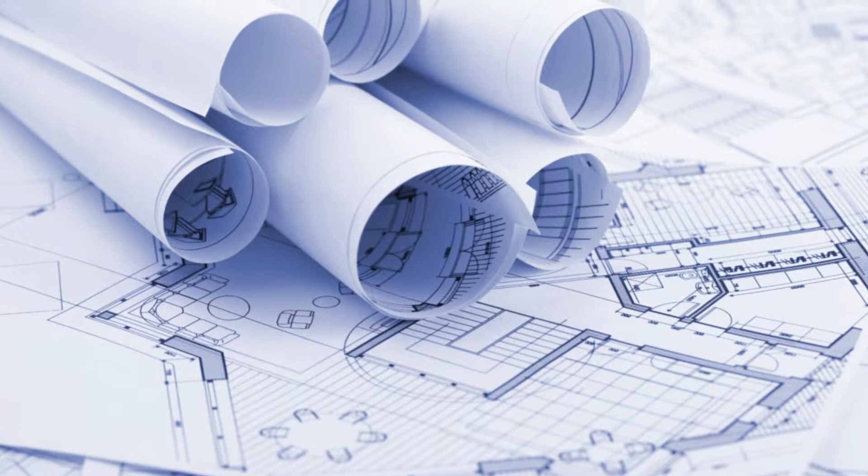How to get rid of the old stuff and what are the plans. Because without that, we've got no direction. If we've got the wrong plans, it's like having a compass that's not actually pointing north when we think it is. So what makes up the plans is basically the quote, the plans, meeting notes, and site sketches. Let's run through them now.

Alright guys, let's get into it. When we go into a job, let's pick this current job that I'm on. We've got 3 folders. For you guys, the foreman, you see site documents, you don't need to worry about these two. So what we're talking about is navigating through the job, having the right scope, having the right plans.

Let's jump into plans, which is where the main stuff is. For this job here, it's pretty early on, nothing's been updated. So what you've got in here, old plans, there's nothing in there. But at some point, as a new architectural drawing comes through, you'd drag this plan up into there and see you later, just dump it in.

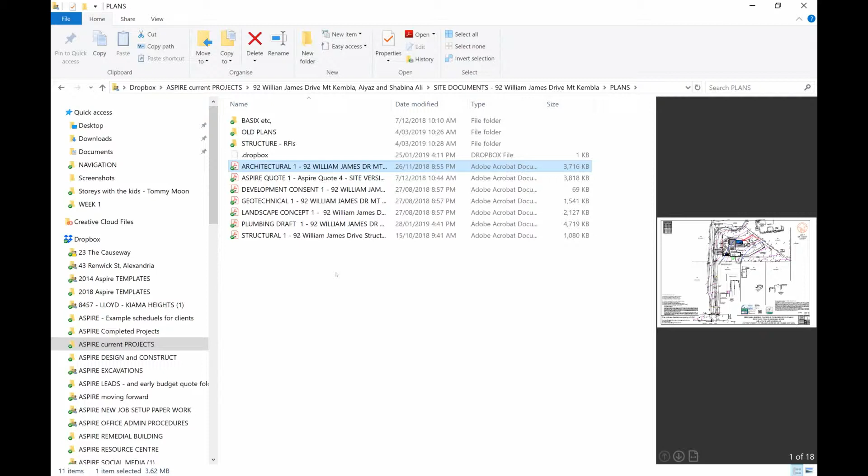So that's your job, guys, managing this documentation and making sure you have the right plans on site and people have the right plans, making sure you tear up the actual printed plans you've got on site and get rid of them. Structural, so in here we've got structural RFIs, there's nothing at the moment.

These structural drawings will probably not change. You probably won't get a structural update, but the scope is increased or slightly changed by the RFIs, requests for information. That might be a screenshot of an email with a picture attached where you say, hey Mr. Engineer, can we do this? Can we change that? Is this okay? Or he might be on site doing an inspection and the same sort of thing happens.

So the one I really want to narrow in on a little bit extra with this video is the Aspire quote. Now, I know you guys have probably heard me say before, open up this quote once a week and read through it. This just has to start happening, because not looking at this quote is almost as bad as not looking at the plans, just starting to set out framework or whatever we're doing, or starting to order structural steel without going through the plans.

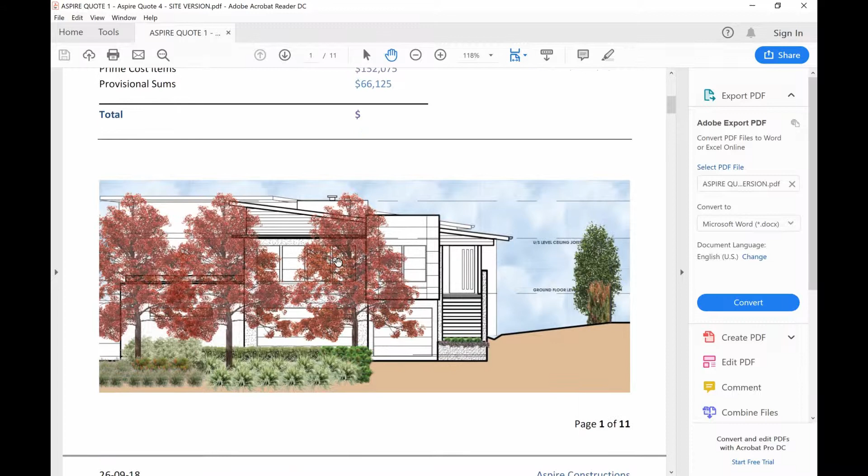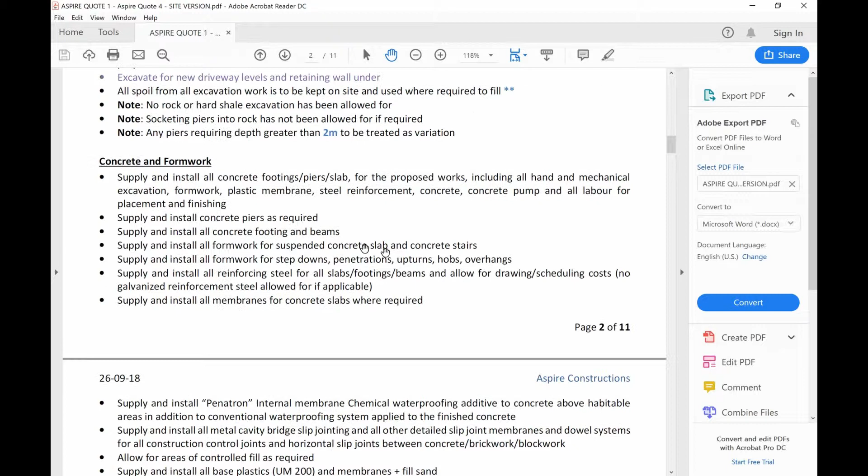What looking at this quote once a week will do is allow you to clear your head a little bit as you cross out things that have been done. As excavation's been done, cross it out. As formwork's been done, cross it out. So as you move through the project, you're crossing things out that you don't need to look at. When the scope's been completed, you're crossing it out. So it's giving you a sense of completion.

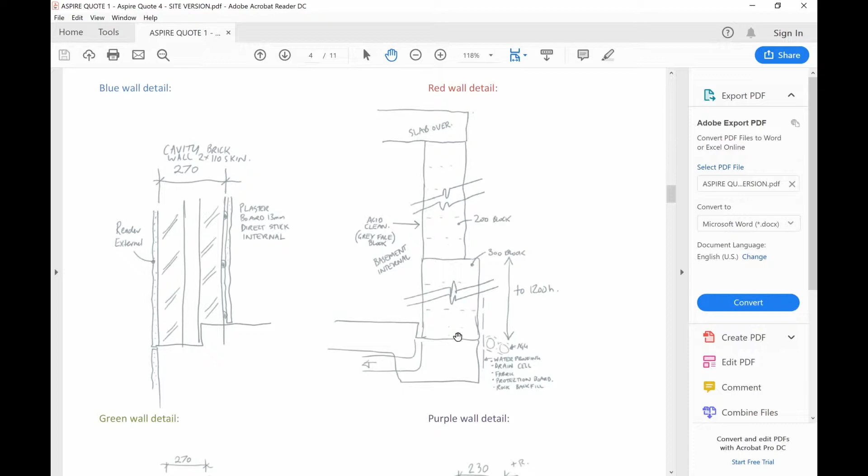The next thing it's doing, it's prompting you, as you read through the whole quote once a week and skim through, about things that should be on the plans that aren't, like a wall detail, or oh hang on, there's a step in the basement. If I set out to the actual wall and then pour the concrete to there, it's going to be 100 mil short. Things like that.

It's going to prompt you and think, okay, hang on a minute, we're getting close to roof. It's just reminding me, roof structure. Hey, we don't have the color, and it's not in the quote and it's not in the plan. I want to get onto that.

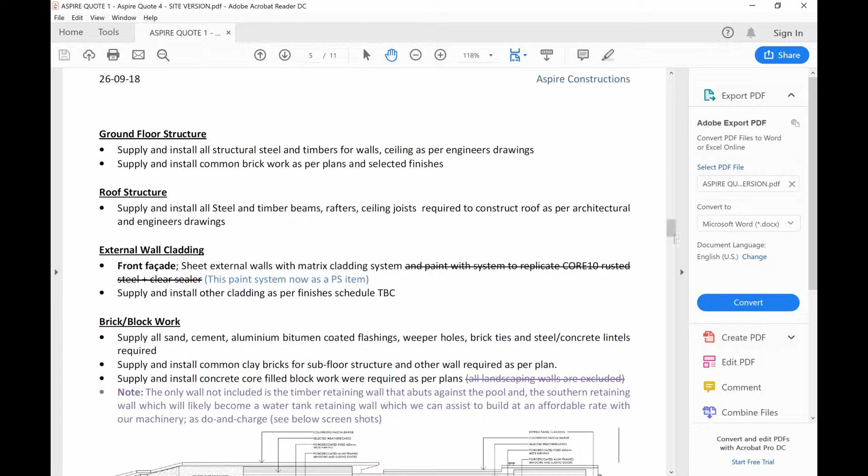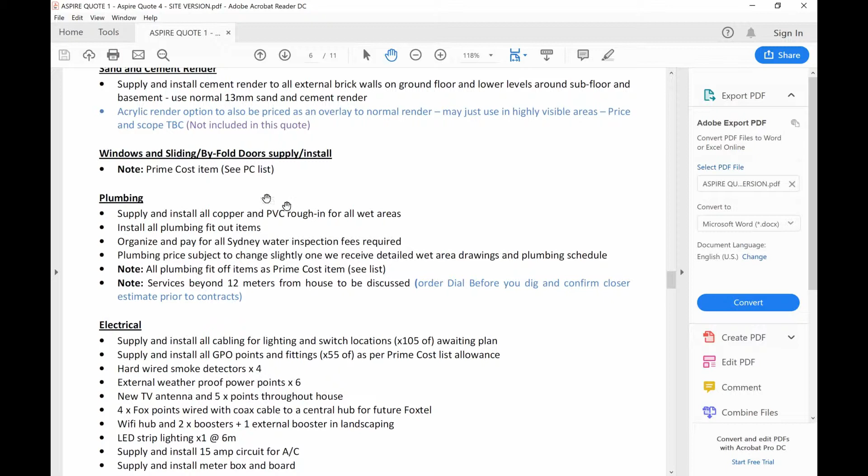All sorts of things will come up, even the trades - you'll think, oh hang on, the trades are responsible. You'll keep them more accountable as you see what they're responsible for. You'll see what's missing too. So if it's not on the quote and it's not in the plans and it's not down here in not included, and it's not in the PC, the prime cost, then where is it?

It's an extra, it's a variation. So by going through the quote and understanding it well, you'll be all over that, which is absolutely important.

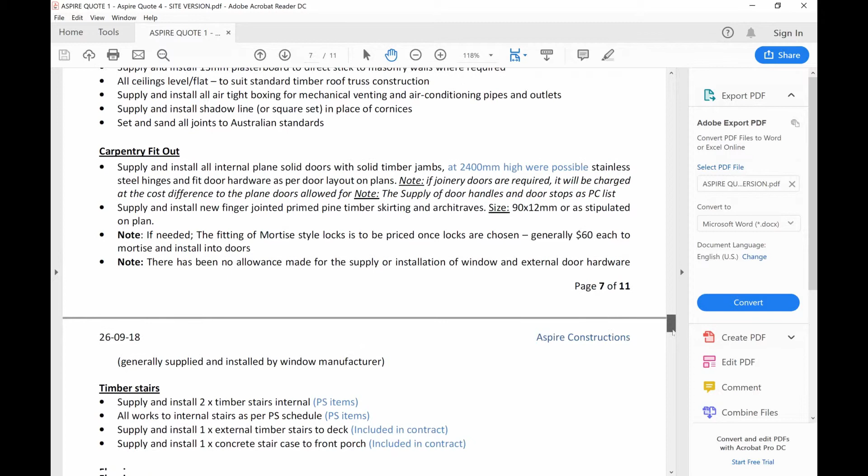The other thing while we're down there is PCs. Understanding this list properly, understanding what's an extra. So external balustrades - knowing that when you get a quote, we're happy to get one quote. We're happy to get the guys that we trust and know are good. We get them in, as long as their quote is decent.

We check it off with the architect. If it's under this amount, then we should be fine. If it comes in at 9 grand, we can pretty much go ahead, keep the ball rolling. If the quote comes in at 15 grand, then we need to talk - to me, to the architect, to the client - we need to see if there's any other options.

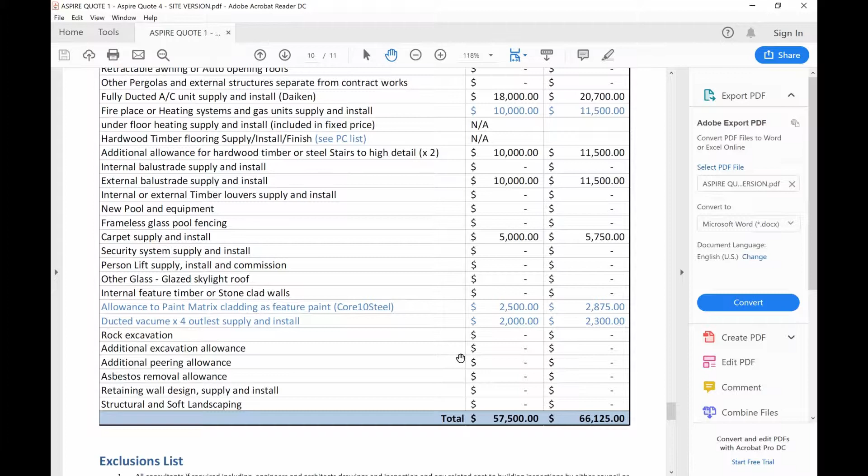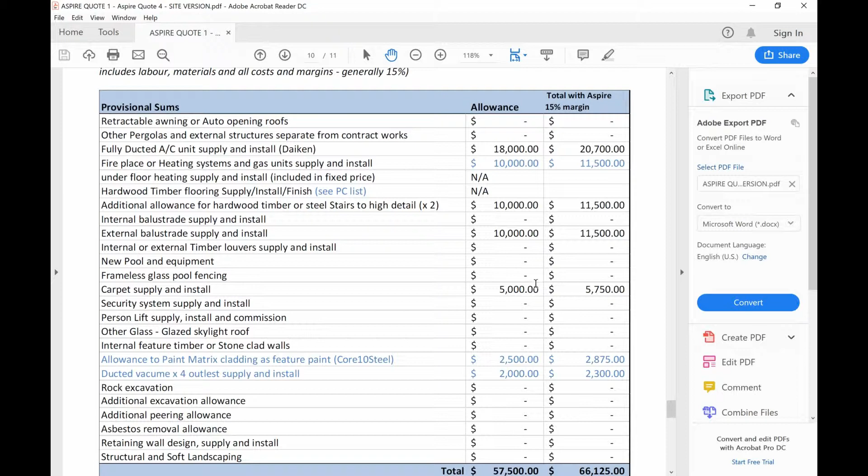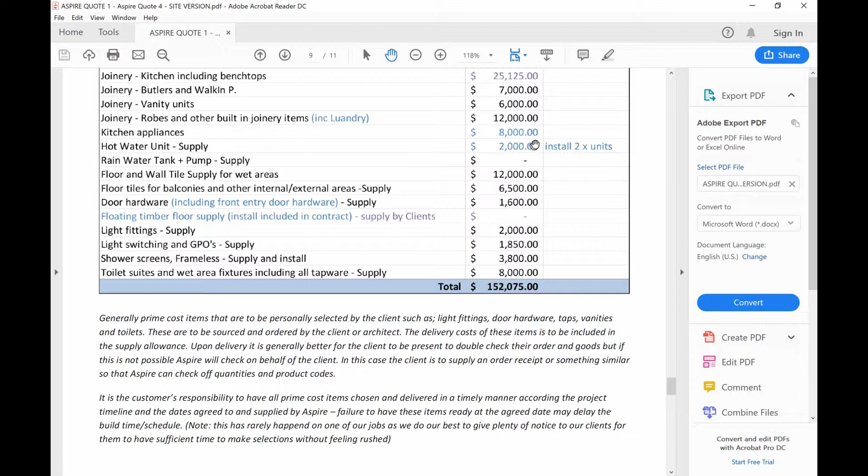But knowing how to subby these things out, and then also letting Riz know in the office so that she can allocate the actual prices, making sure that the invoices or the credit card receipts from these things - usually credit card receipts will be from these things - as you purchase the hot water unit or whatever, you'll send her through that, and she'll know it's part of the PCs, and to allocate that cost to it.

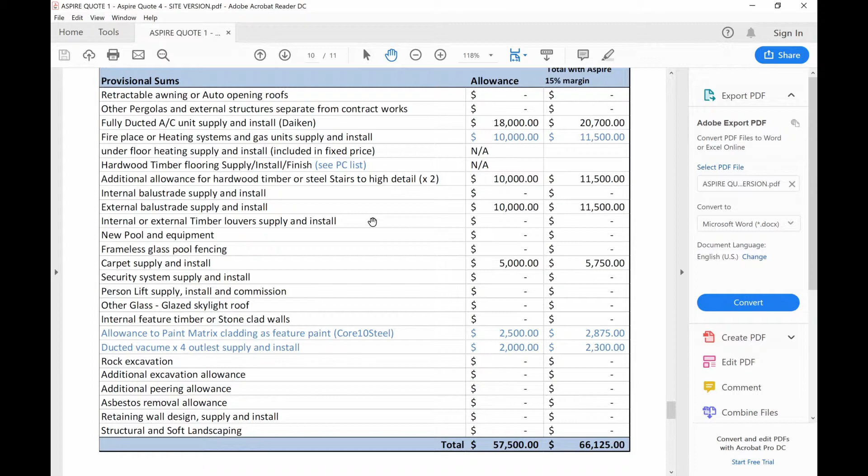She can then update a spreadsheet, because all this stuff, prime costs and provisional sums, are really, really important for the client. It's really important that Riz gets them accurate, gets them updated on a clear spreadsheet, and she actually sends that through. Each time we invoice, they get this spreadsheet sent through that shows them exactly where they're at.

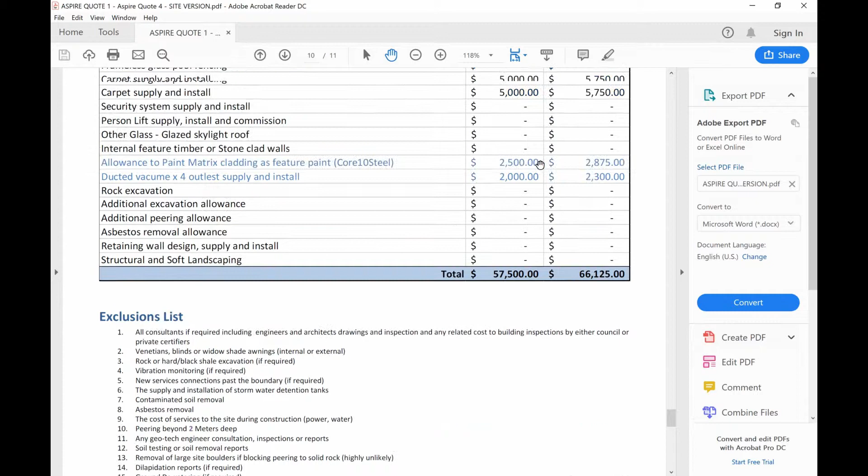So for you guys, the flow on of understanding this quote and knowing this quote is just real basic, like the plans. You've got to know it. But it also flows on and helps us relay the right information to the client.

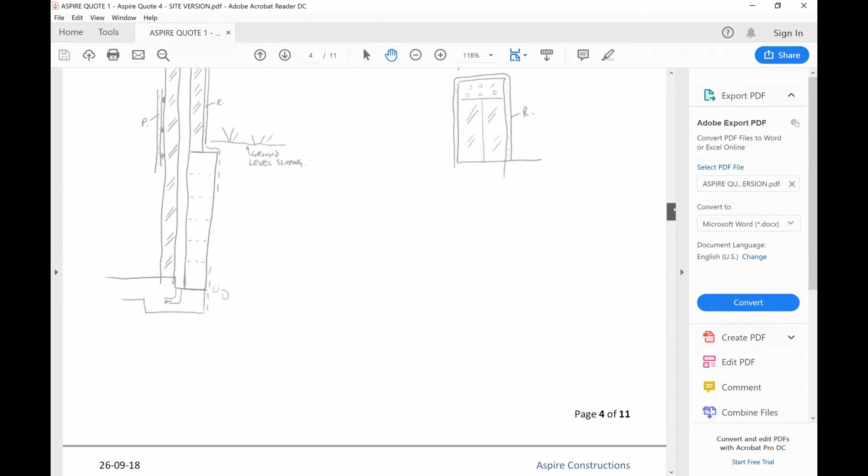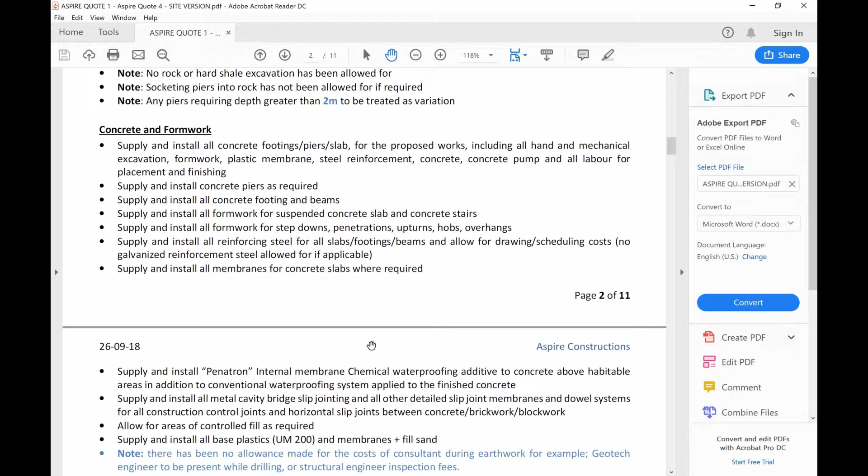It makes the client's experience better. But at the end of the day, if you're not looking through this quote once a week, you've got to ask yourself, are you doing your job properly? When you're putting your timesheet in to get paid, ask yourself - have you looked through the quote? Have you looked through the plans that week? Have you read the fine print? Have you done a skim over the plans?

When you're skimming through this, another one you should think about, especially if you're getting out of the ground stage, is you should be skimming over these notes on the structural drawings. There's not a single builder that I know that does this, and they get themselves in trouble. Knowing these notes, knowing what the cover is, knowing the different types of concrete you need to order.

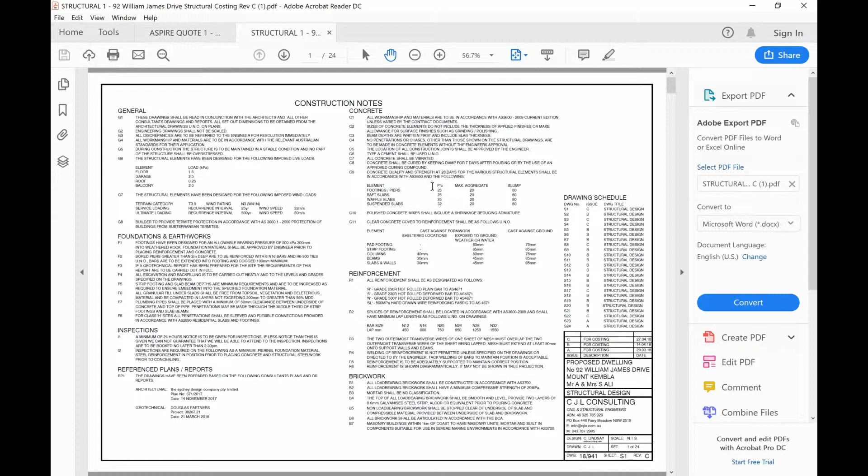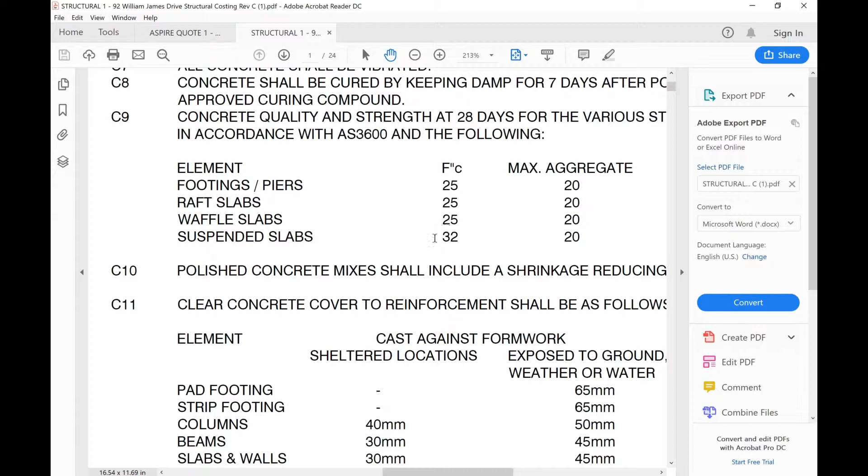Suspended slab 32 - what if you're not that experienced in ordering concrete, and for the day you ordered you started pouring 25 MPa? Things like that. So the next one I want to go through - we've covered plans, making sure you've got the right plans, updating it properly.

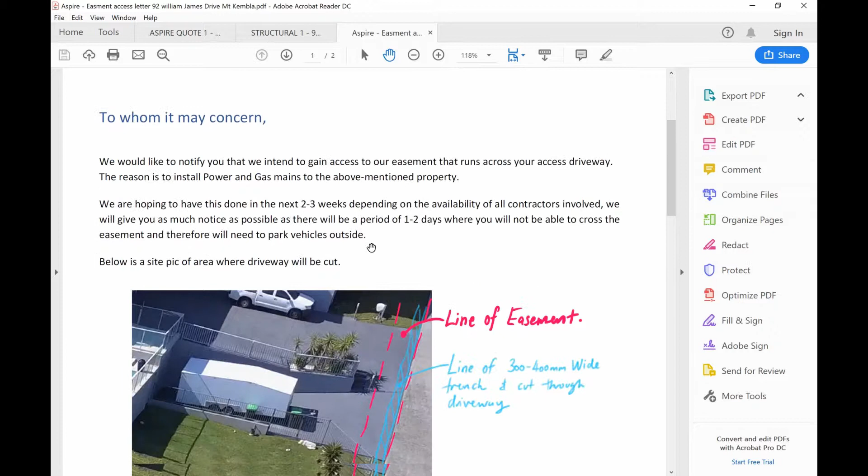The other one, which is part of the scope, is site meeting notes. At the moment I haven't really got any site meeting notes. I dropped this in here because it sort of becomes part of the scope. This is just a letter to the neighbor for this particular job, discussing what we're going to do, how we've got to gain access to get our services through, just giving them a bit of an update. For me, I just thought that's somewhere easy to store it. I don't have too many folders in this job at the moment.

But generally, site meeting notes and site sketch and notekeeping - that's what we've called it. So any site sketches that I do on site with you that actually help understand the plans, that help show something that's not shown on the plans - the same thing happens in the meeting notes.

There's usually drawings that show something that's not on the plans, and that increases the scope of works. We'll quickly go into another job.

We'll go into Alexandria. Actually, we'll jump out of there because on that job the architect usually does the notes. On other jobs, when we have a meeting with the client, it's generally going to be me that does the notes.

So we'll go into Kiama, which is a good example job, and we'll go down to site meetings. We've got quite a few in here. We've even got some pre-tender notes, where we hadn't even signed contracts, and I was coming up with a few design issues or ideas, or trying to help the client out.

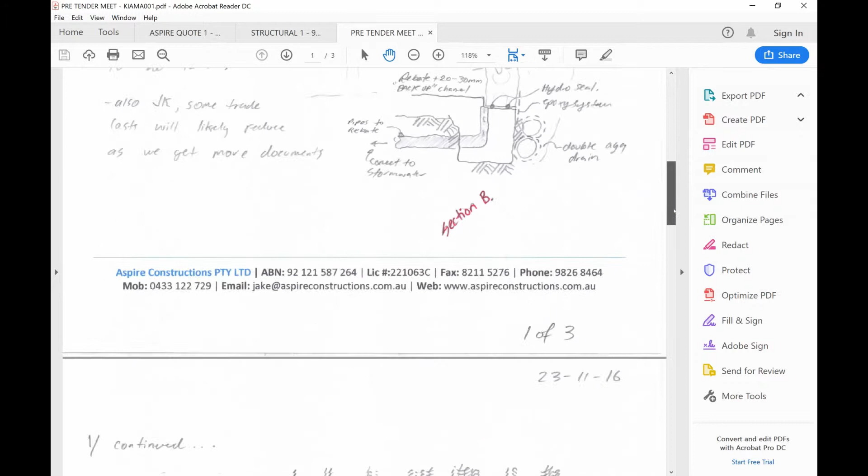So these are just handwritten notes. Let's get out of there and go to one that's a bit more up to date. So site meeting notes, say number 6.

Let's jump in here. With the site meeting notes, not only does it add scope, it adds clarification for the client. It helps them feel that we're on board, that we understand, and that we've got a track of the changes. It also lists actions required, and depending on who was there, it keeps people accountable.

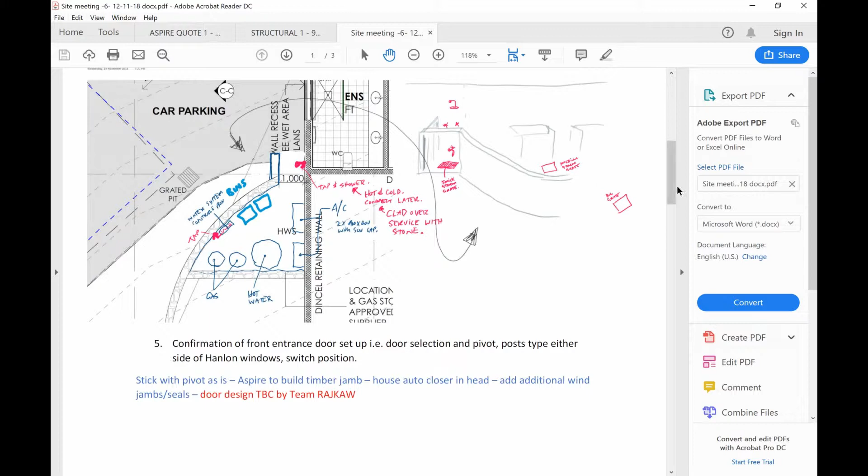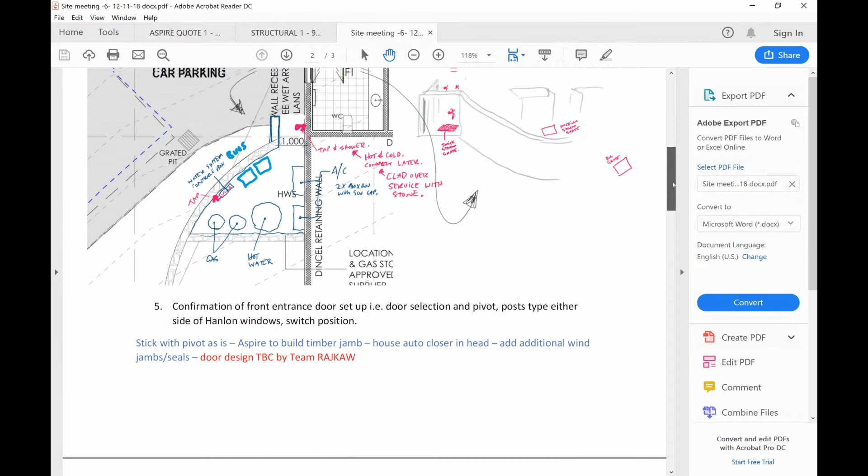So again, a bit of a layout here. None of this is on the drawing. The aircon units are shown out the front of the job. It's a complete mess. So if you've got a set of plans on site and your plumber comes to start roughing in and doing whatever, he's going off the plan.

He doesn't have this. So that's where you need to be really, really careful of these sorts of things that actually become part of the plan.

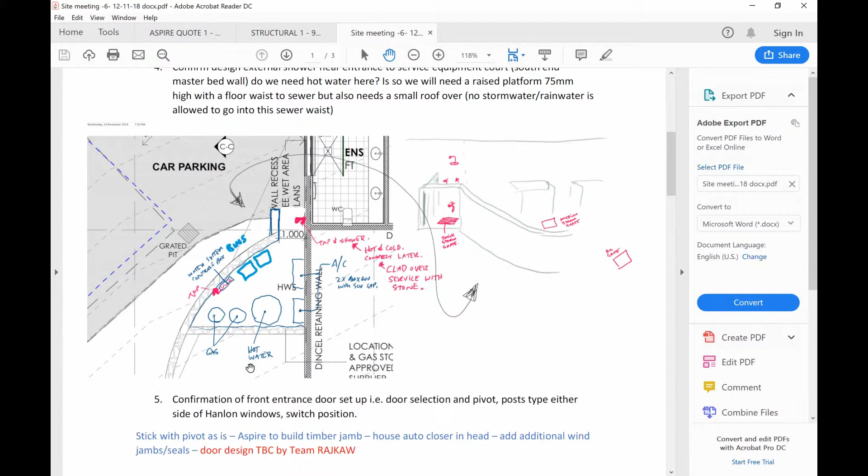In some cases, the plan will need to be updated to suit this so that everyone is on the same page. In other cases, you can just keep these site meeting notes on you, and again, it's like the quote.

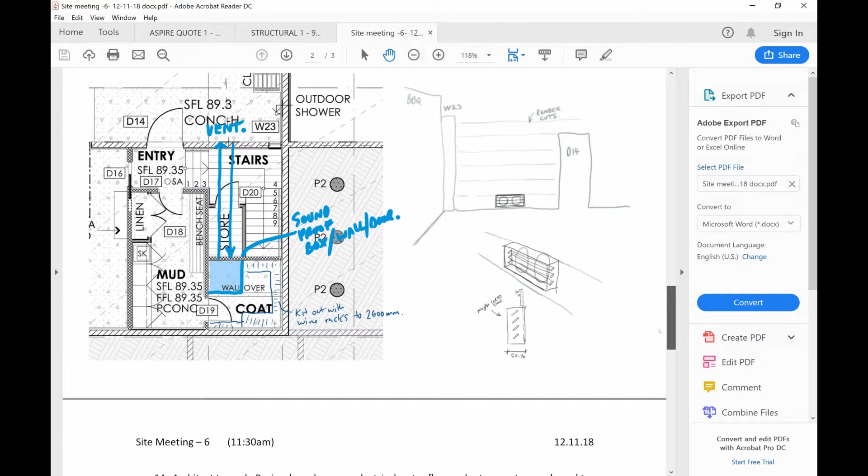You flick through, you cross out things that have been done, and you highlight things that are potentially going to get missed, because there's no point having these meetings, talking about something, and then just not doing it. That's just the worst thing.

Here's another example, another meeting note. There's quite a bit going on in here, discussing all sorts of things with the client.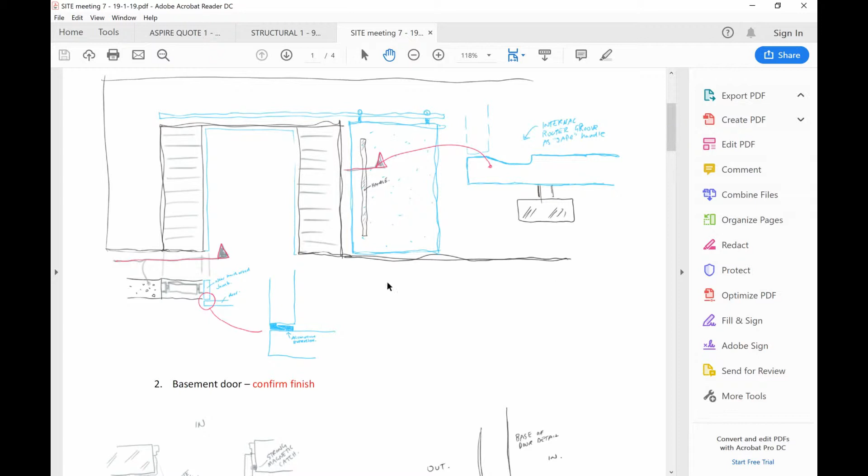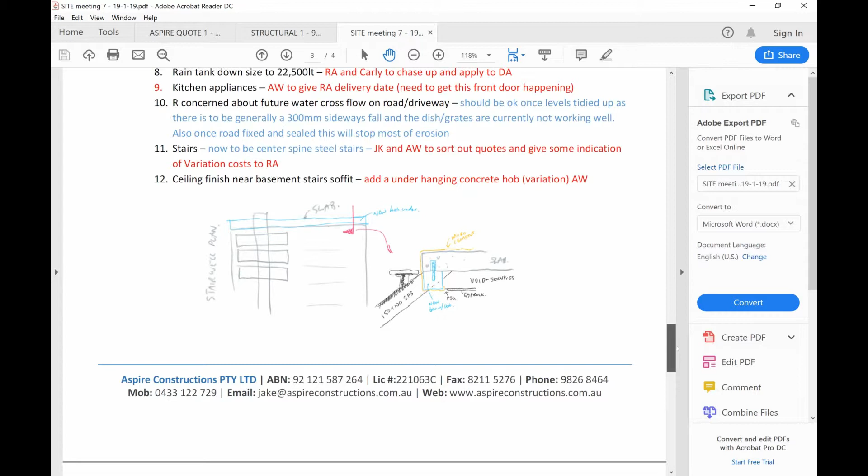Services - a lot of this information needs to be on hand, ready to go, to relay across to the contractors or whoever's involved. So here's a good example of one that's not quite enough info.

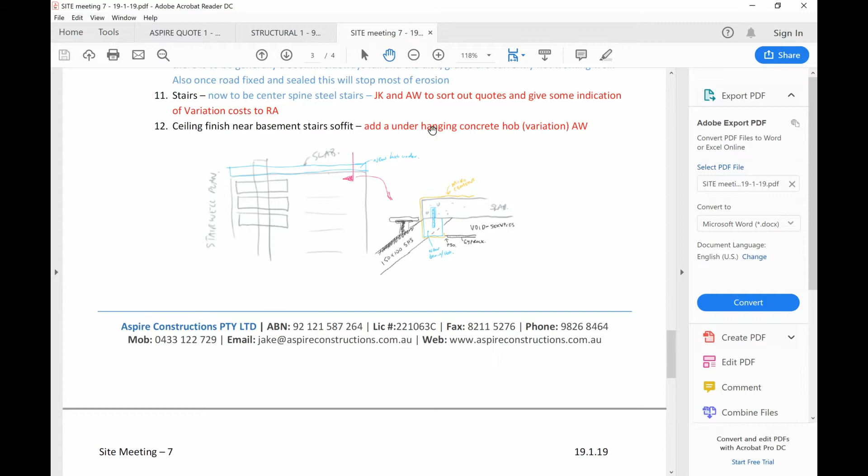So we've got to start here with a drawing of what needs to be done. We probably need to draw it in a bit more detail and make sure the client understands what they're getting, and make sure that with communication, this stuff and the client—like I've said before—the person at fault when communication fails is the communicator.

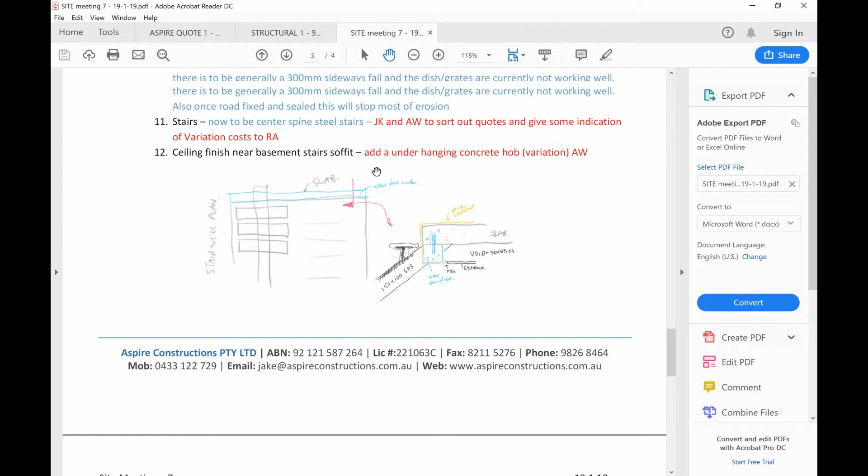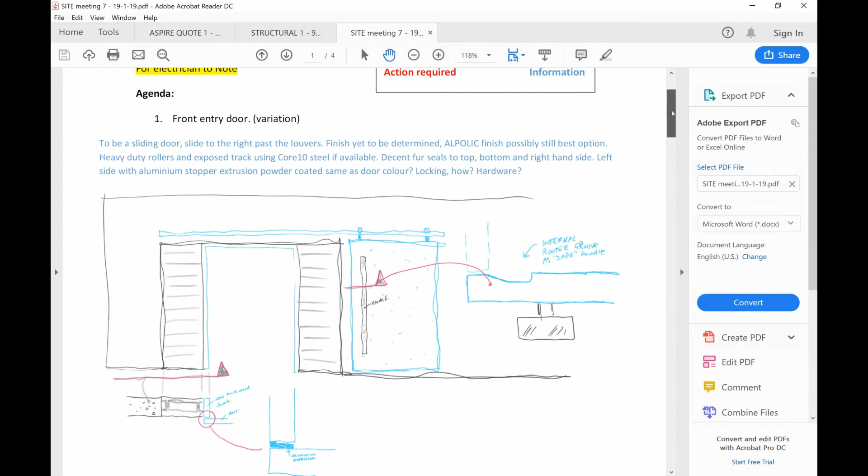We can't blame the client. We've got to explain things really well. Whether we use media, videos, Dropbox, whatever we do, we've got to make sure we get the point across. We're completely screwed if we don't have the right information in the first place.